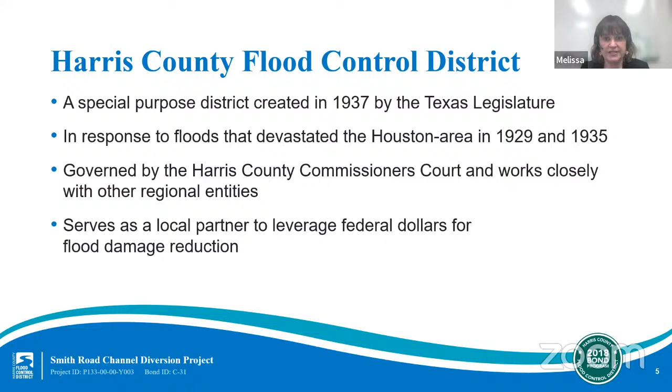The mission of the Harris County Flood Control District is to provide flood damage reduction projects that work with appropriate regards for community and natural values. One of the most difficult challenges we face is constructing effective projects that are sensitive to community and natural values in highly urbanized areas.

Harris County includes 23 main watersheds, totaling approximately 1,800 square miles and more than 2,500 linear miles of channel. 2,500 linear miles is approximately the distance from New York to California. Now, a watershed is a geographical region of land that drains to a common channel or outlet, and each watershed has its own characteristics and unique needs. The project we're presenting on tonight is in the Greens Bayou watershed, located in central and eastern Harris County.

Harris County and our surrounding area is flood prone for a number of reasons. Namely, we experience rainfall events, including tropical storms and hurricanes. Our area is made up of flat, slow draining lands. And finally, we see large concentrations of clay soils that do not soak up excess rainfall quickly.

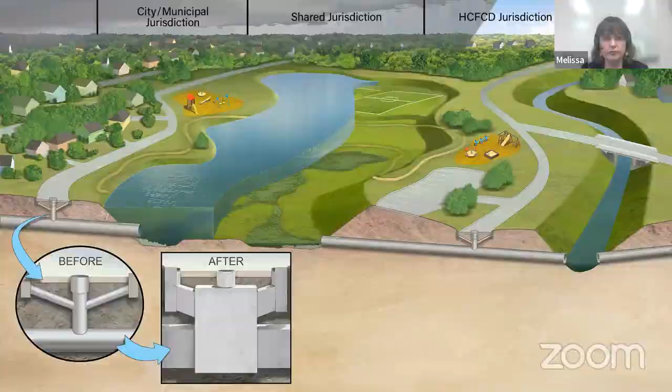On August 25th, 2018, Harris County voters approved $2.5 billion in bonds for flood risk reduction projects. This vote followed a series of 23 meetings with community members across Harris County, one per watershed, which resulted in a list of what is now 181 bond projects. As of August 25th, 2021, every project included on the 2018 bond program has been initiated, including the 11 projects in the Greens Bayou watershed.

A total of more than $1.35 billion in partnership funding has been secured so far to stretch the 2018 bond program even further. The actual timing of each individual project will depend on a variety of factors, including environmental permitting, right-of-way acquisition, and utility relocation, and in some cases, requirements of a particular grant. Project lists and project schedules are updated regularly on our website.

While the bond was for $2.5 billion, the full cost of every project in the bond table is almost $5 billion. So we made it clear from the outset that we would need funding partners to fully construct the projects in the bond program. As I mentioned, we've had some successes so far, having secured more than $1.35 billion in partner funds for projects across Harris County.

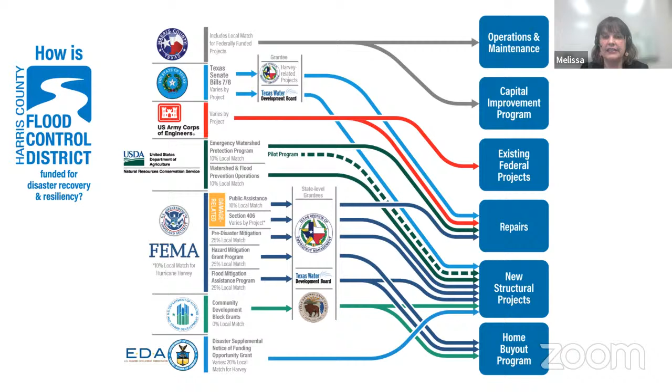This graphic illustrates the many sources of those partnerships, including federal, state, and local funding that the Flood Control District is working to secure for Harris County. Each agency has its own definition of eligible projects and its own requirements for local match funding. So the Flood Control District works diligently to match projects to the right partnership opportunities.

We will now move on to the part of the program that is specifically about the Greens Bayou watershed and the Smith Road Channel Diversion Project. As a reminder, we are looking for your input as we discuss this project in more detail. Please feel free to drop any questions or comments into the comment box or to comment via phone by pushing the star key.

Flooding of homes and businesses along Greens Bayou and its tributaries has occurred numerous times in the last 30 years. Devastating flood levels surged throughout the watershed during Tropical Storm Allison in 2001 and in Hurricane Harvey in 2017. Significant floodplains and high-density developments have combined to cause high damages during even moderate flood events. This area was largely developed before our current understanding of flood mapping, meaning that many structures are within the floodplain.

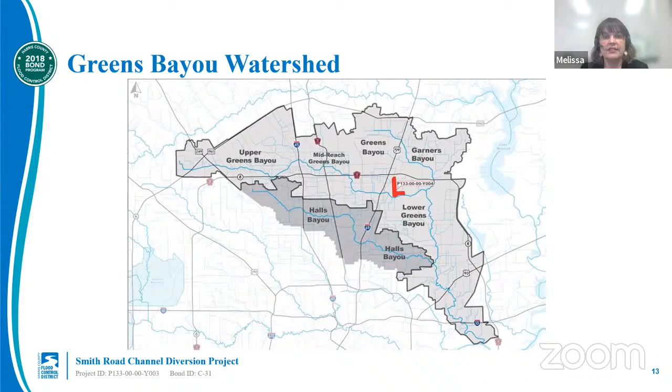Additionally, the lower 10 miles of the watershed, which is generally the portion downstream of US 90, are tidally influenced. This means that water levels are influenced by the elevation of water in the ship channel. As such, storm surges can impact flooding levels in this portion of our area.

When we look at Greens Bayou, we divide the watershed into three areas: Upper Greens Bayou, from Cutten Road to Veterans Memorial Drive; the mid-reach area, from Veterans Memorial Drive to JFK Boulevard; and Lower Greens Bayou, from JFK Boulevard to the confluence with the Houston Ship Channel. Each of these areas have their own flood mitigation strategies and visions.

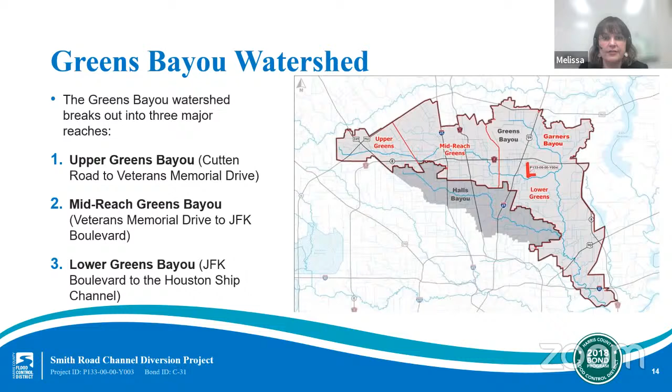This project is located in the Lower Greens portion of Greens Bayou, from JFK Boulevard to the confluence with the Houston Ship Channel. As you can see on the map, this project is more specifically located in northern Harris County near the Fall Creek subdivision. Within this area, tributary P133 is a natural tributary of Greens Bayou, which flows through the Fall Creek subdivision before emptying into Greens Bayou.

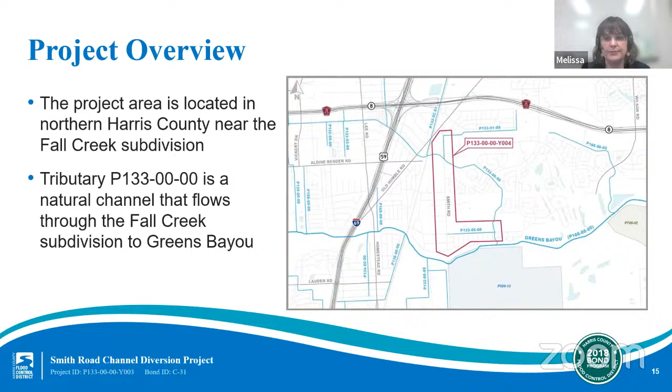We often talk about our flood mitigation toolbox. These are the various techniques we typically deploy to reduce flooding. It's important to find the right type and right configuration for each project. Tonight's project focuses on channel diversions. Diversions are available when there is a location to divert floodwater that will not cause adverse impacts, which we will talk about in more depth soon.

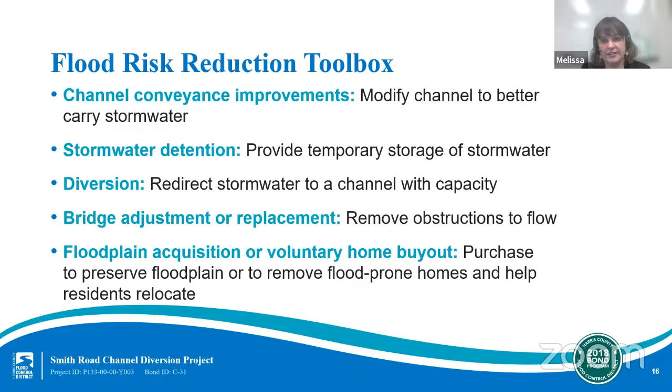The purpose of this project is threefold. First, the project will reduce flood risk along Smith Road. Second, the project will reduce the potential for future erosion along tributary P133 by reducing flow within the channel. And last, but certainly not least, the project will improve drainage along Smith Road.

As we mentioned in our discussion of the flood damage reduction toolbox, channel diversions are one of our less commonly used tools. The Flood Control District chose channel diversion in this case because our feasibility study and preliminary engineering report showed that channel diversion was the best solution to achieve our project goals.

$6.6 million in funding for this project was secured through a CDBG-DR grant from the U.S. Department of Housing and Urban Development. This funding requires that the project being funded primarily benefits low and moderate income individuals. To meet that requirement, the Flood Control District surveyed the area and determined that the standard has been met.

In addition to that national funding, $800,000 of funding will come from the 2018 bond program. An additional $4 million of funding will be provided by the Harris County Flood Resilience Trust.

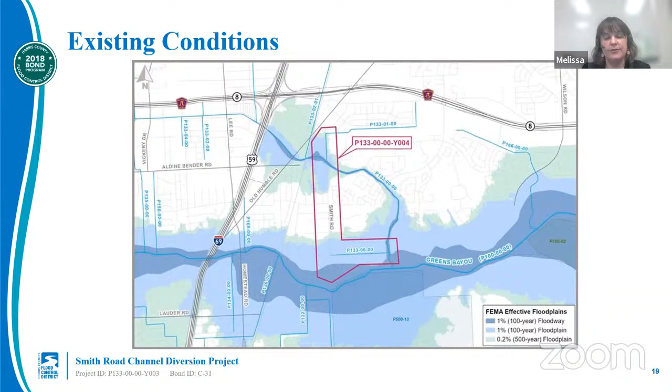As you can see from the map of existing conditions, the area around Smith Road is within the 100-year floodplain. This project will remove approximately 70 structures in the area from the 10% or 10-year floodplain and reduce the inundation area.

I will now discuss the project in greater detail. This project will provide an alternative route for excess water to flow along Smith Road. Per our project description, we propose placing an 84-inch concrete pipe along the west side of Smith Road and along Dory Lee Lane to improve channel flow.

In order to install the concrete pipe, construction will need access to the portion of driveways within the public right-of-way along Smith Road. During the construction period, these portions of driveways within the right-of-way will be removed and mailboxes will be temporarily relocated.

After construction progresses to different portions of the project area, we will replace the driveways along the west side of Smith Road that we removed. In addition, we will replace the driveway culverts along the west side of Smith Road.

For this project, we are coordinating closely with the Humble ISD district to address any impact on school bus routes along Smith Road.

This project will have significant benefits for the structures in the impacted area. First, the project will reduce the potential for future erosion along P133 within Fall Creek subdivision, and the less erosion, the greater stormwater conveyance capacity of the tributary.

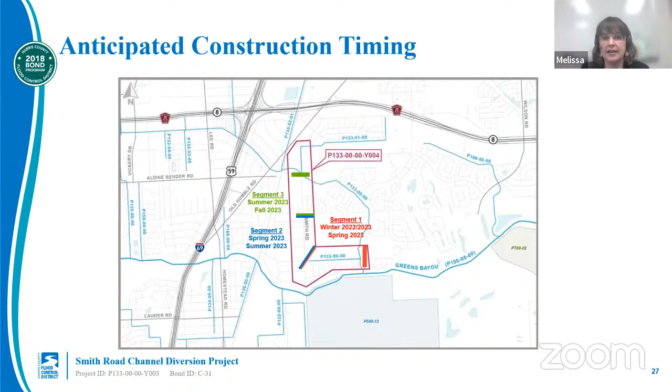We are actively seeking community engagement in the construction process and invite that all comments be directed to the Flood Control District during this meeting or afterwards. And we welcome any additional comments, which can be submitted at our website at hcfcd.org/C-31.

Like I have mentioned throughout this presentation, we really want to keep you all informed on the progress of the project and when you may see construction impacts. We will be sending periodic updates via email during construction, and we are happy to answer any questions you might have.

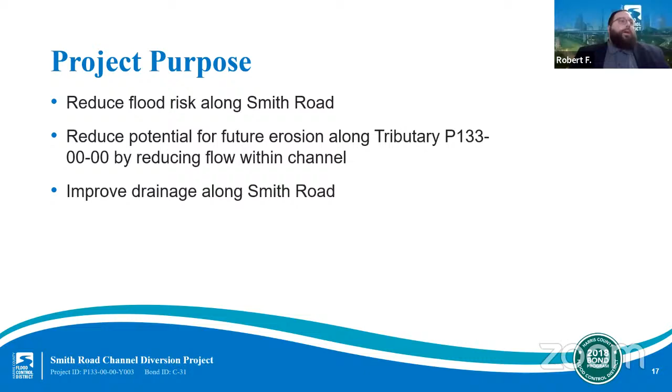All right, thank you, Tojuana. Our next question is for Andrew. Andrew, where is the project area? The project is located in northern Harris County near the Fall Creek subdivision.

Thank you, Andrew. This next question is also for you. Timothy comments that he lives on the east end of the Eastex Oaks subdivision, and starting about 10 years ago, they've had ongoing flooding issues. His question is, what will the proposed improvements do to change the drainage in their neighborhood? And can they expect this investment to help them sleep at night whenever it rains? What subdivision is it? It is the Eastex Oaks subdivision. That is not part of our project. I don't believe it.

Okay, thank you, Andrew. This next question is for Melissa. How does the flood control district find out about areas that are flooding, and how are these areas prioritized? That's a very good question. There's a couple of ways. We have gauges throughout Harris County that we keep track of every time it rains. We have historical databases connected with these rain gauges, so we really know very accurately how much rain falls in certain areas of town and at what point the rainfall comes outside of our banks. So we know which areas tend to flood more often than others. Another thing we've done is, prior to the 2018 bond election, we held several meetings, one in each watershed, and actually engaged with the community. We also took public input via our website and came up with a list of projects based on what communities were saying, because no one knows the neighborhoods like the people who live in them. So anytime in the future, if you have information you'd like to get to us, we welcome those kind of comments, and we will continue to keep track of issues.

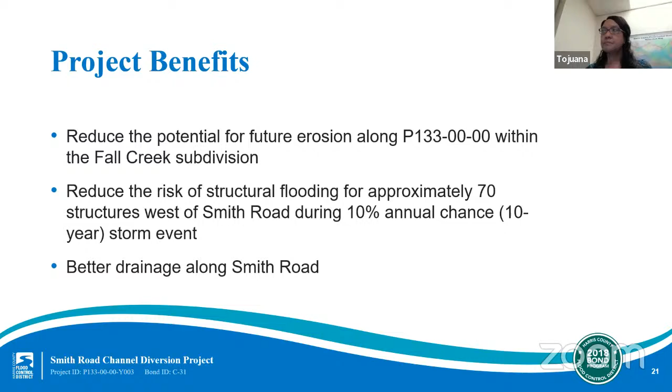All right, thank you, Tojuana. Our next question is for Andrew. Andrew, how was the project funded?

The flood control district received a grant of 6.6 million for community development block grant for disaster recovery from the United States Department of Housing and Urban Development to fund the portion of the construction. The remaining funding needs are met by local funding.

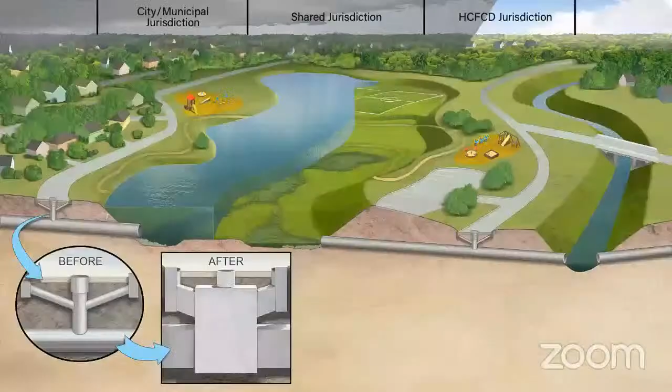Perfect. All right, so this slide here, on the left, illustrates the various jurisdictions in the area that play roles in flood risk reduction. Inside the neighborhoods, as shown on the left side of this illustration, storm sewers and roadside ditches collect stormwater runoff and start the process of moving it away from your homes and your streets. So the drainage inside your neighborhood, under the roadways in front of your house directly, is usually the responsibility of the underlying municipality, usually a city or a MUD. As that drainage moves further away from your house, once it gets over to the right side of the illustration and is into a larger bayou or basin or channel, that is what the flood control owns and maintains.

So what we're talking about today, we're talking about the Smith Road diversion, which has to do with the larger drainage, not necessarily directly in front of your neighborhood.

And Timothy, we will follow up with you. I just want to make sure I look at a map before I answer anything specific about subdivision names. Thank you so much, Melissa.

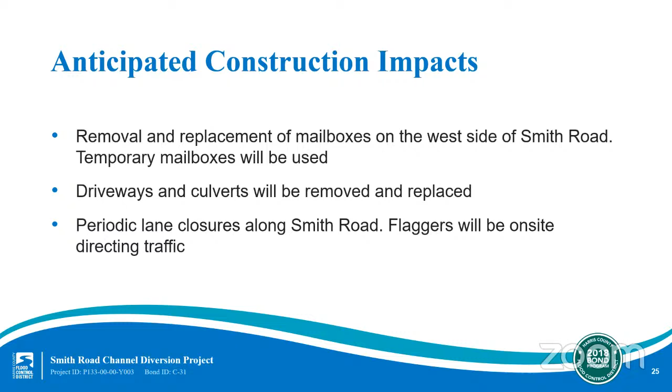For this project, we're coordinating closely with the Humble Independent School District to address any impact on school bus routes along Smith Road. We're also collaborating closely with the Office of Precinct 1 Commissioner Rodney Ellis to ensure that residents are aware of the construction impacts on the community and engage with the community.

In our anticipated construction timing, we expect to begin construction this winter. It's important to note that this timing is preliminary and will depend on how quickly the construction team moves along the project area. One thing that is certain is that construction will begin on the downstream portion of the project, which is along Dory Lee Lane, and last several months before construction moves on to the Smith Road portion of the project.

Residents along Smith Road may see heavy trucks moving up and down Smith Road at the start of construction, but we do not expect any impacts to resident driveways and mailboxes to begin until we start construction along Smith Road, which should be sometime next spring. Those with property backing up to Dory Lee Lane will see construction activity in the easement.

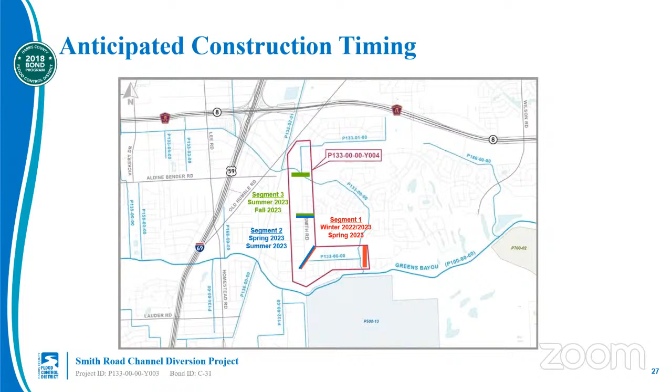We are actively seeking community engagement in the construction progress and invite that all comments be directed to the Flood Control District during this meeting or afterwards. We welcome additional comments, which can be submitted at our website, hcfcd.org/C-31. We will send periodic updates via email during construction, and we're happy to answer any questions you might have.